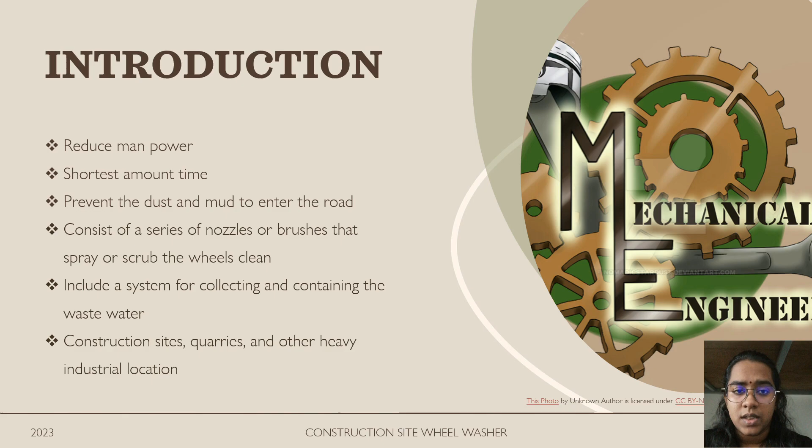For the introduction, the wheel washer is meant for construction sites, to reduce manpower and the time needed to clean perfectly, preventing dust and mud from entering the road to avoid accidents. Its purpose is to minimize the time taken to wash wheels one by one. It will help convince construction sites that need to clean all vehicles leaving the site.

For the problem statement, construction sites rely on manpower to wash wheels, which takes a long time if they receive a large number of vehicles in a short period. It is not only short of manpower energy, but also short of water pressure. To avoid an accident, we must make sure the wheel is clean before leaving the construction site.

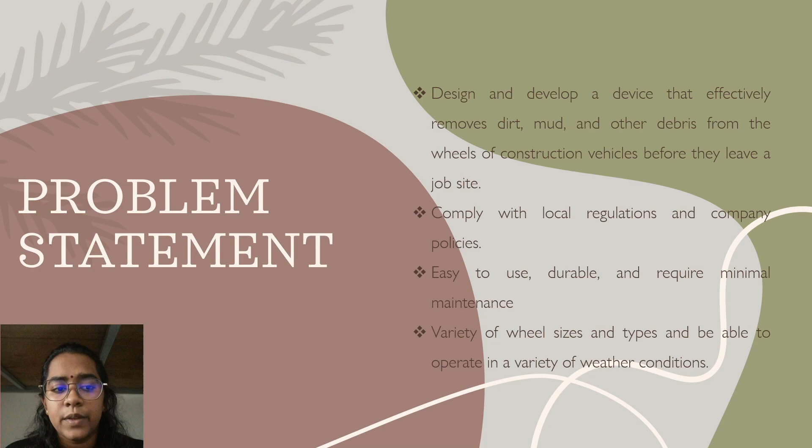There are a variety of wheel sizes and types that can operate in a variety of weather conditions. The objective of this project is to design and develop a functional and easy to use wheel washer machine for the construction site.

Number one is to effectively remove mud, dirt, and other debris from the wheels of construction site vehicles. Number two is to prevent the spread of dirt on public roads and highways.

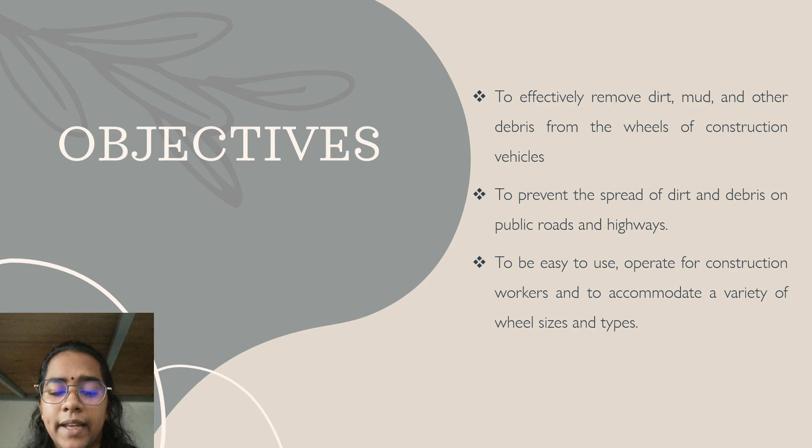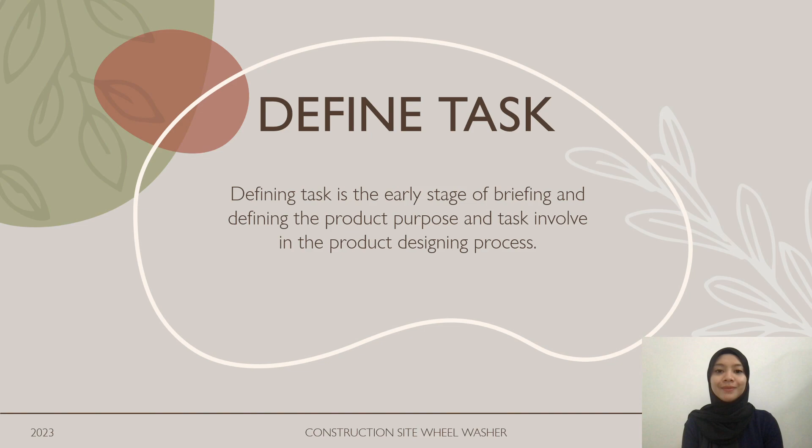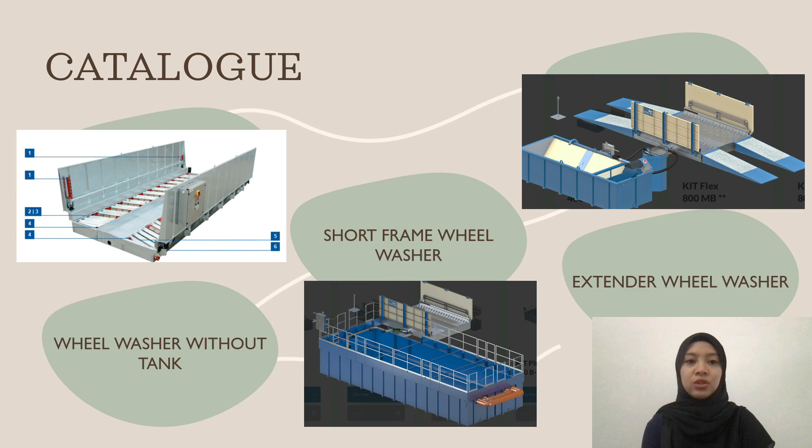There are 3 types of design in the catalog: first, wheel washer without tank; second, short frame wheel washer; and lastly, extender wheel washer.

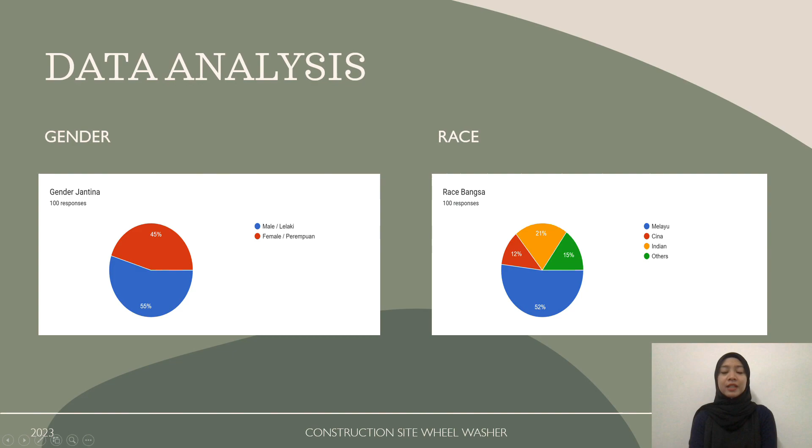For the data analysis from question A, we can see that males have 10% more responses than females, and for the rest, 52% are Malay, with the remainder being Chinese, Indian, and others.

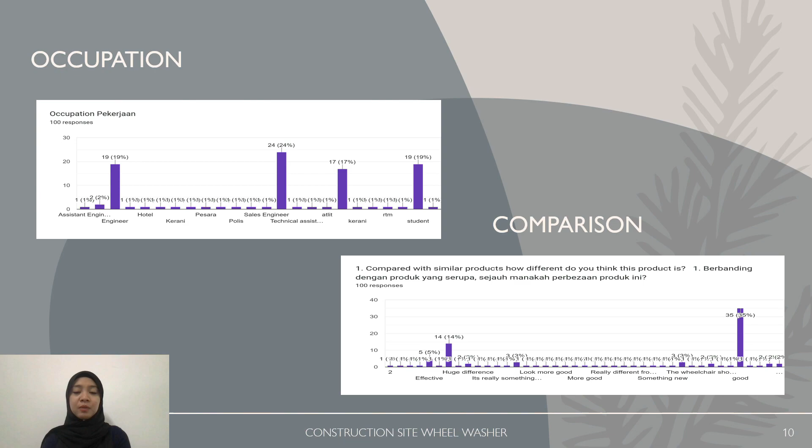The comparison between new products shows similarity with all products. The majority of respondents answered good for the new design.

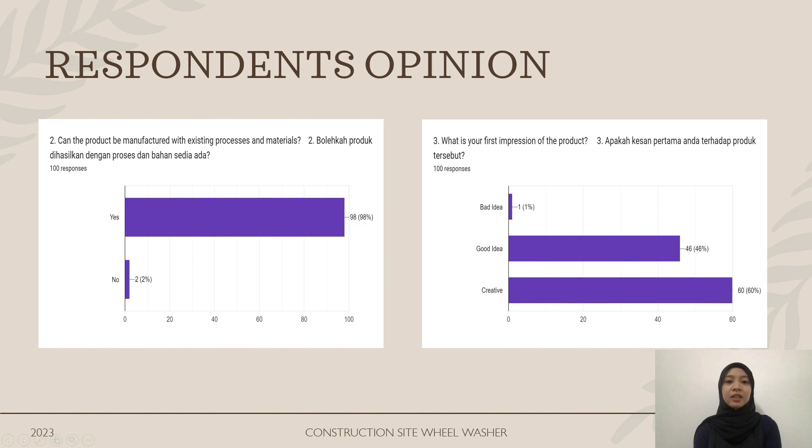For the necessary time, yes is 68%, while maybe is 28%. And for the ability to support, respondents chose yes at 62%.

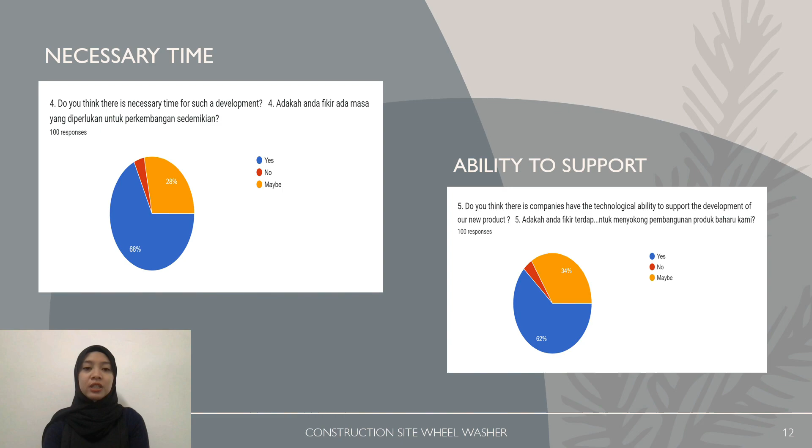For the improvement, the cost, the function, and the design are rated higher than others.

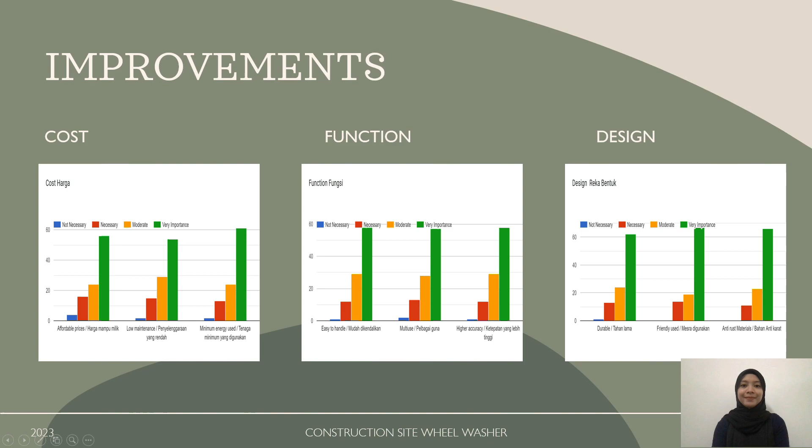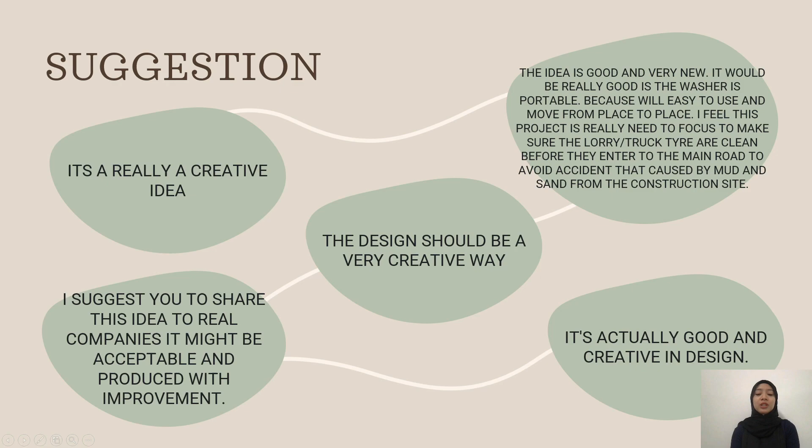There are 5 suggestions that respondents gave us, which include: it's a really creative idea, the design should be a very creative way, and it's actually good and creative in design. Thank you.

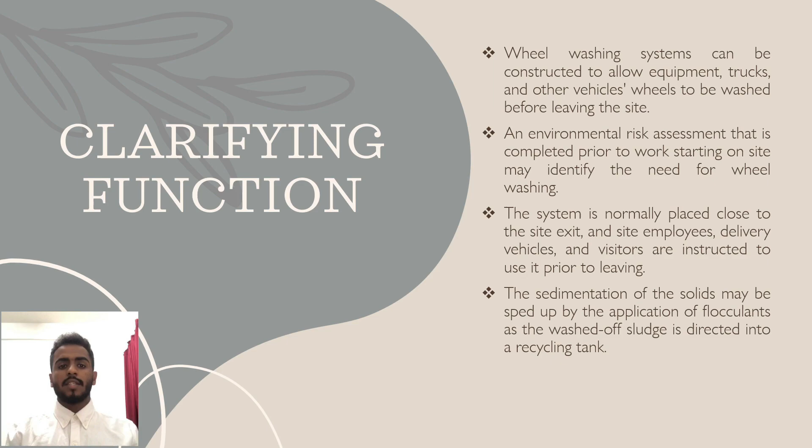Our product is detachable and portable, meaning it's easy to detach and separate, and also easy to transport from area to area, and spray the water from each side.

And our product doesn't waste water - it reuses the water at the end of the process.

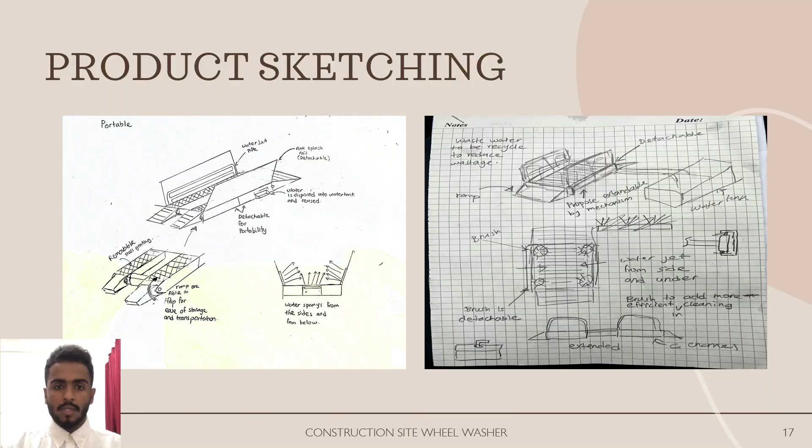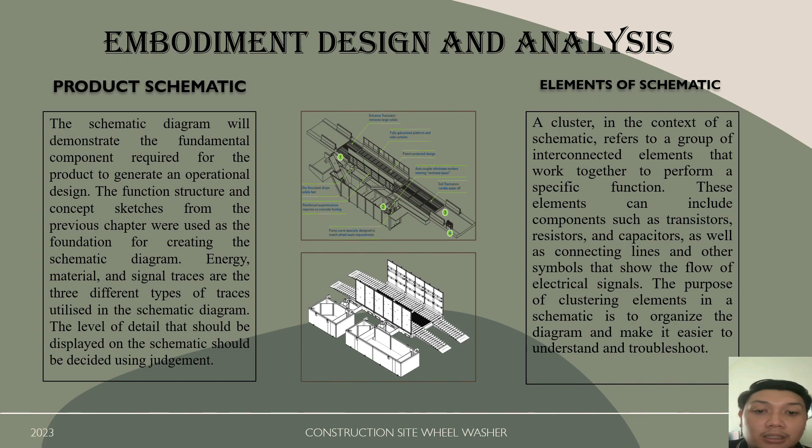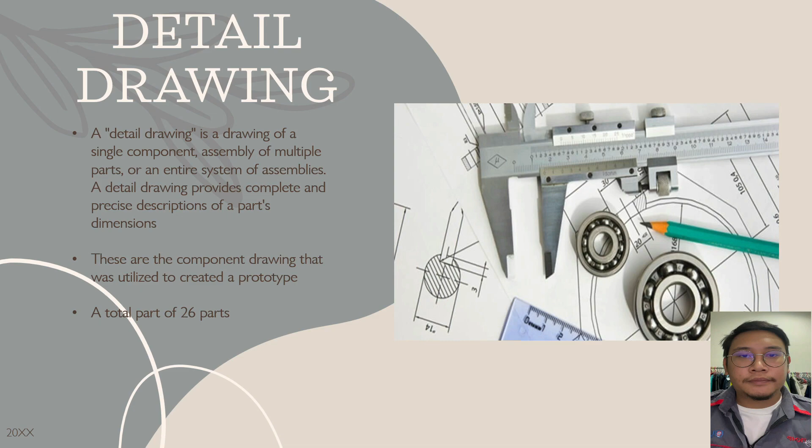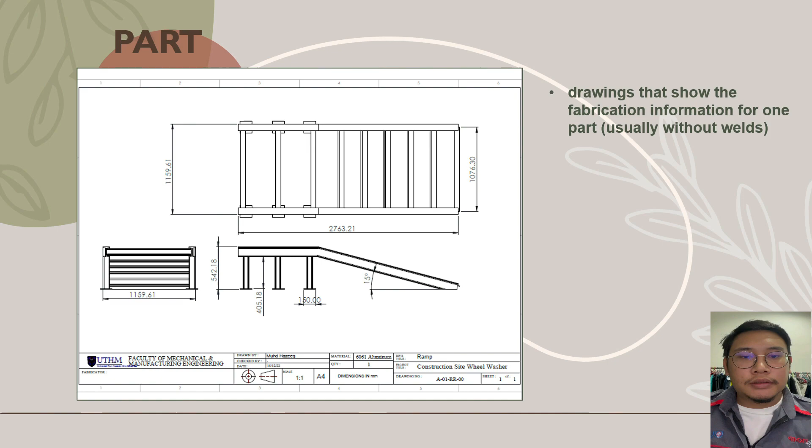There are a total of 26 parts in this project. A part is a drawing that shows the fabrication information for one part, usually without welds. From this image, you can see one of our parts in this project, which is a ramp.

Next is assembly. Assembly is a drawing which displays the parts of a machine or machine unit assembled in the relative working position, known as an assembly drawing. For this image, this is the assembled design that we had assembled in the output.

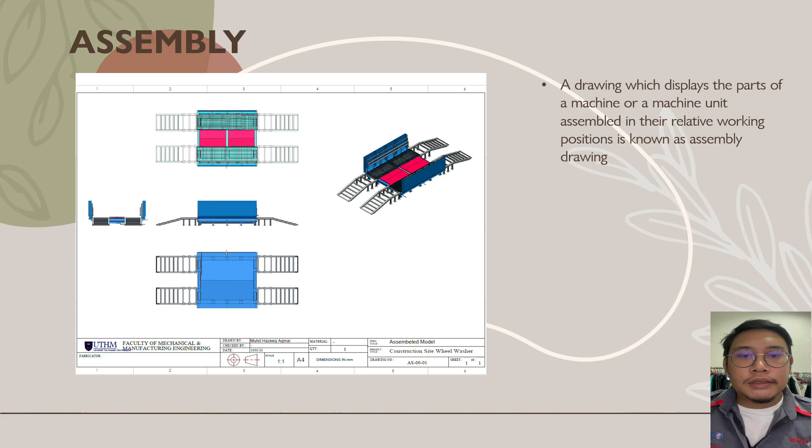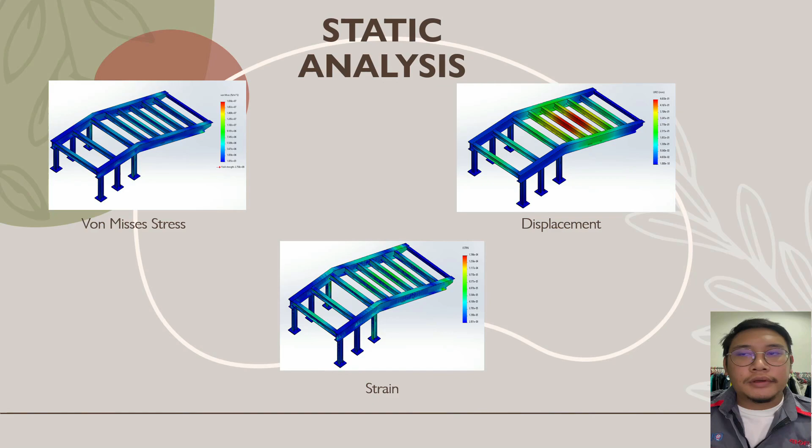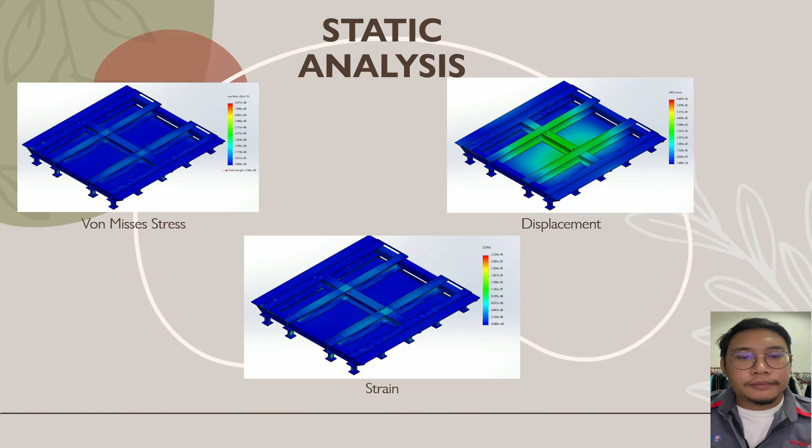Static analysis. From this ramp, we have conducted static analysis for von Mises stress, displacement, and strain. As you can see, there's a large strain on the inclined part of the ramp, while for the main body frame, it is more focused displacement on the middle part of the drawing. This is the analysis.

For the function test, the prototype performed is intended and functions in produced water. For the stress test, ensuring that the body frame and ramp does not bend and fail under the load. And last, reliability test: the prototype can be used for a long time without collapsing.

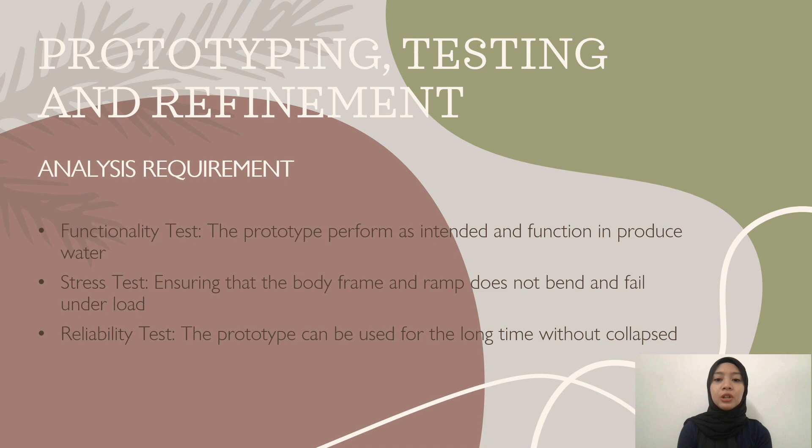This is the checklist that we need in our project. First, the body frame is for connected to grating. Second, the ramp is to help elevate onto the body frame. Third, anti-splash is to prevent water from splashing outside the operation.

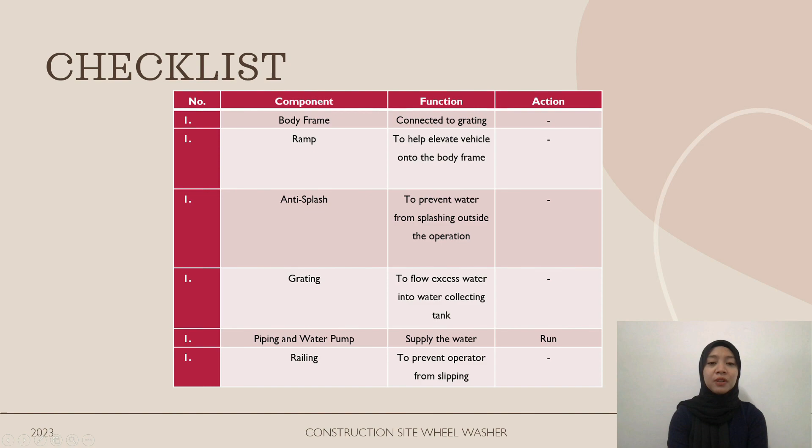Fourth, grating is to flow excess the water. Fifth, piping and water pump is to supply the water. And last, railing is to prevent the operator from slipping. Thank you.

Basic concept: sustainable development is rapidly becoming an inspiration for many governments throughout the world. Overall, sustainability has been defined in a variety of ways as frequently seen to include three basic components: environmental sustainability, economic sustainability, and social sustainability. Overall sustainable development necessitates achieving environmental, economic, and social sustainability at the same time.

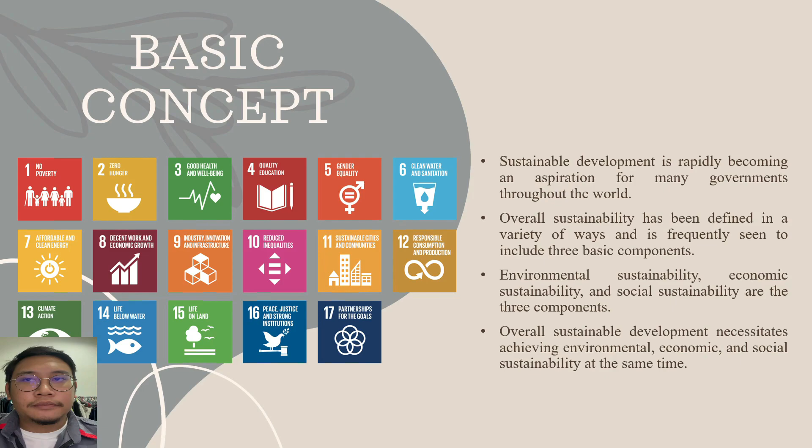Next is the sustainable design principle. A sustainable design shares the big picture view of how our choices affect more than the present. Effective sustainable design is a comprehensive approach to selecting and integrating products and processes that account for long-term consumer satisfaction and environmental conservation.

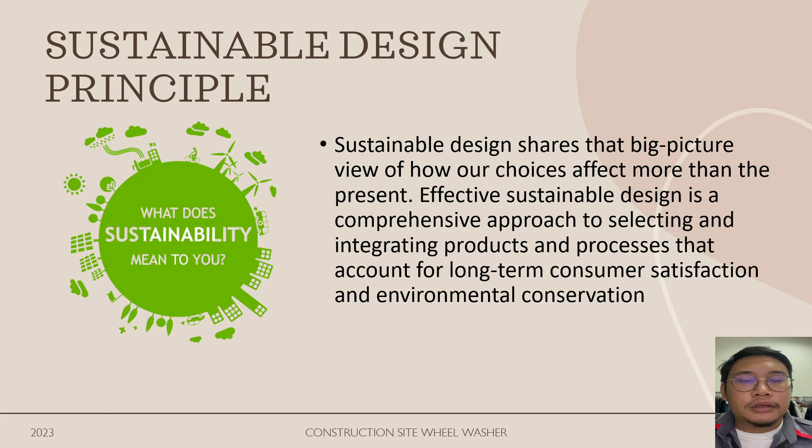The 6 design principles are form, function, and usability; cost-effective solution; durable design solution; renewable energy; and material recycling.

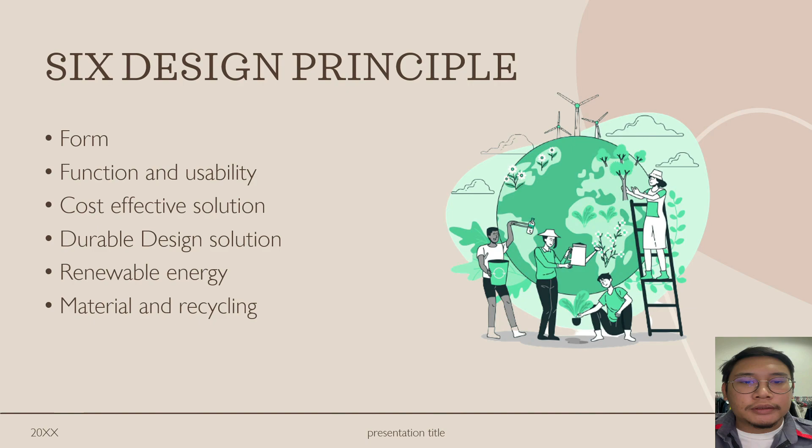Cost evaluation is the process of determining the total cost and expenses associated with our product, including direct cost like material and labor, and indirect cost like overhead and administrative expenses. It's used to determine the feasibility and compare the cost of different options.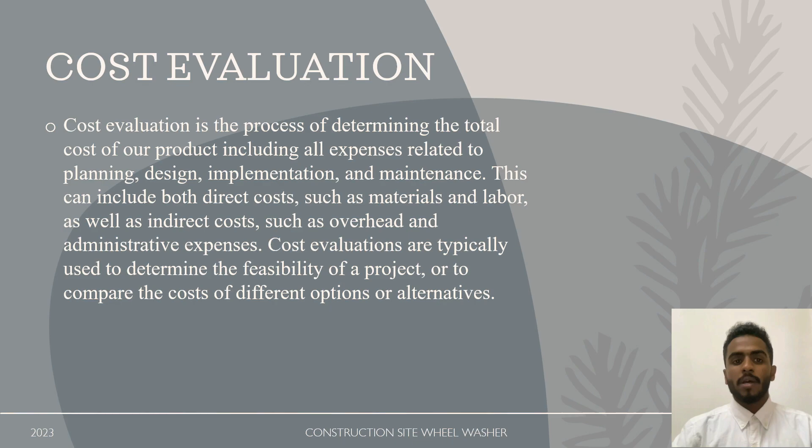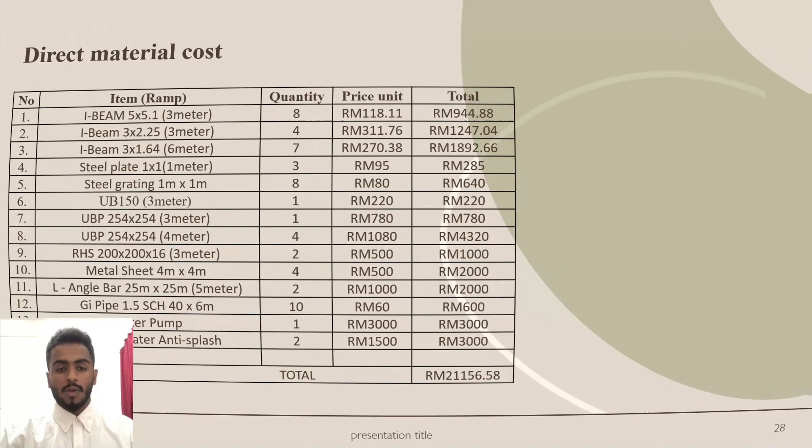Manufacturing cost consists of three types: direct material cost, labor cost, and overhead cost. The direct material cost is the cost of all materials used for our product, like I-beam, steel grating, water pump, steam water, anti-splash. It's called direct material.

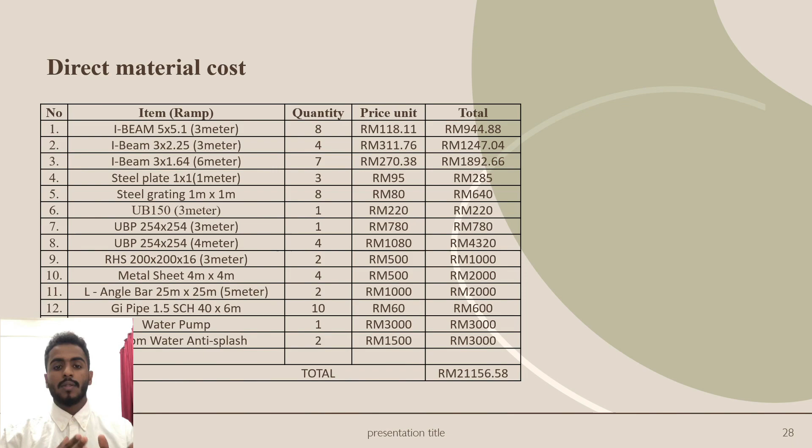The labor cost includes the fabrication work, like welding, machining, cutting, and assembling. It all costs, as I mentioned in the slide, 5,000, and the transportation cost is 2,000. The total is 7,000, and we use the cost per unit formula to get the total direct labor cost per unit.

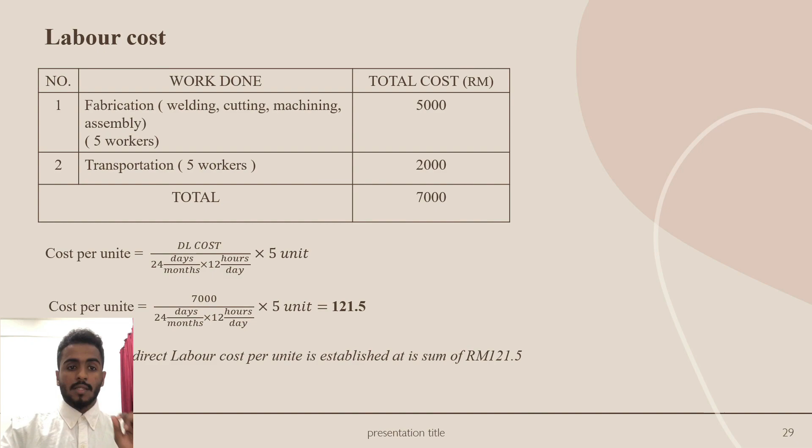Established at a sum of 121.5 ringgit.

The overhead cost, which means the rent, electric bill, and water bill. As I mentioned here, the electric bill costs us 350 ringgit, and the water bill costs us 400 ringgit. The total is 750, and we use the cost per unit formula to get the total overhead cost sum.

It's summed up at 13 ringgit. The total cost for 1 unit is 21,291. Thank you.

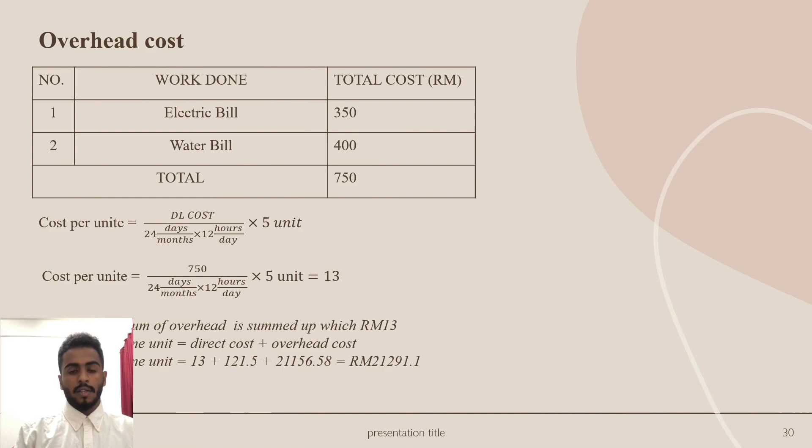For the business plan, we study about the company background, product description, competitors, and the main point, which is the key to success. To produce a product, the key to success is important in all projects.

For conclusion, a brand new idea was generated in this study by designing a construction site wheel washer to clean the wheels of construction vehicles before they leave the site. This is done to prevent the spread of dirt from the construction site to public roads.

The conclusion is that a construction site wheel washer is an important tool for maintaining cleanliness and safety on construction sites, and can help prevent damage to public roads and the environment. Thank you.